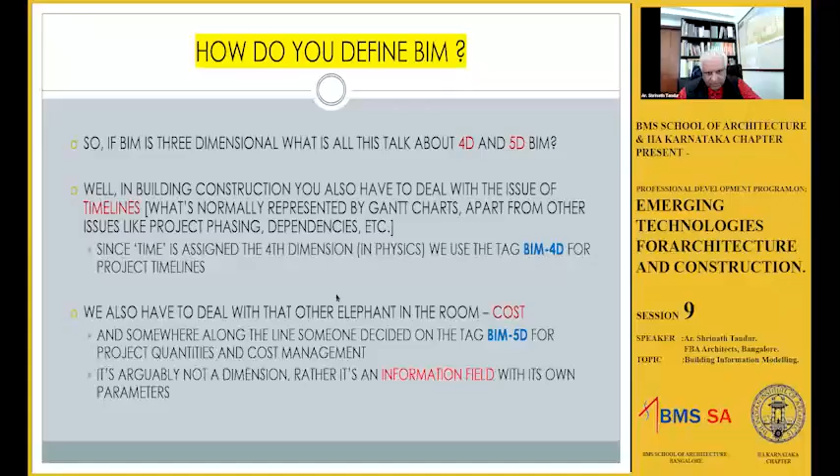Yeah, so I'm going to move to building information modeling. And while it says emerging technologies, we should realize that it has been around for over 30 years in some form or the other. But in many cases, it has been in the field of advanced engineering, advanced institutions. So architects have adopted BIM into their practice, but still there is a hesitancy, and still we see a lot of architects who ask questions like, what is this BIM? I already have CAD, why do I need BIM? And if they are convinced that they should go for it, then they say, how do I integrate it into my practice? Have other architects successfully implemented it?

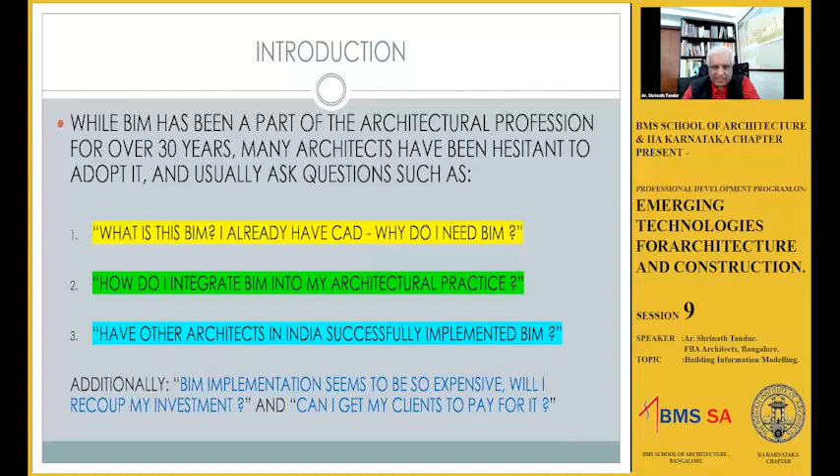BIM's implementation seems to be expensive. Can I recoup my investment? Or probably the most important question is, can I get my clients to pay for it? Now, these are the questions that we will try and look at in the next few minutes. There are many aspects to BIM. It's now a vast subject. Building information modeling started off very basic, and now it's gained a lot of traction. And in the time allotted today, what we can do is not really a deep dive, but we will look at an aerial view of the whole thing, and we'll look at the challenges of BIM in architectural practice.

So we look at a brief history of BIM. We look at how do you define BIM and differentiating between 3D CAD and BIM, because there's a lot of confusion there. And again, in the audience, I don't know how many people are expert at this, how many people are in the process of implementing, and how many of you are new to this. So I'll have to balance the talk without getting too deep in it. And we'll look at things like BIM dimensions and the granularity of BIM.

And one important thing that I will touch upon is the interoperability between architects and their consultants. See, the client normally looks at the architect. They don't see what's happening behind the scenes. We have an array of consultants, and sometimes it's very specialized, and not all of them are on BIM. So how do you work it out?

So implementing BIM in an architectural practice and setting up a computing environment is very, very important, because after you've done your basic thinking, you're now handing it off to a production environment where your computing environment has to be really solid.

So the impetus to design, when I use the word design, I'm using it with quotes, because people confuse drafting with design. Earlier, you used to have the acronym CAD with the CADD, computer aided design and drafting. Most of the time, it used to be drafting a model, whereas virtual buildings today have their roots in manufacturing.

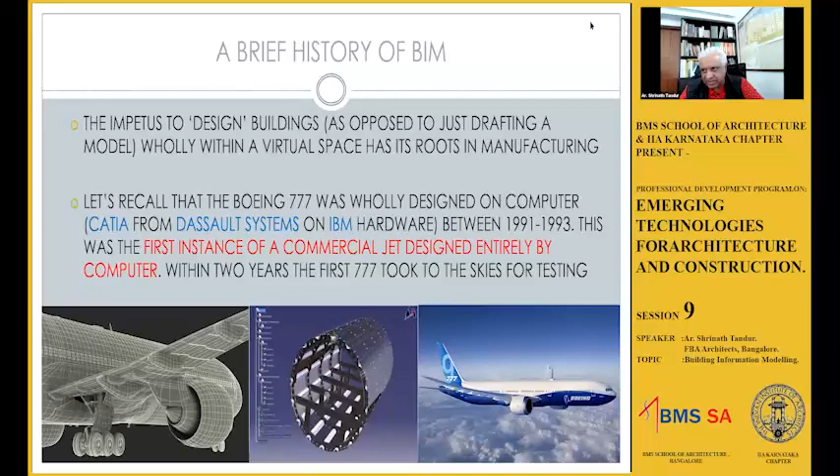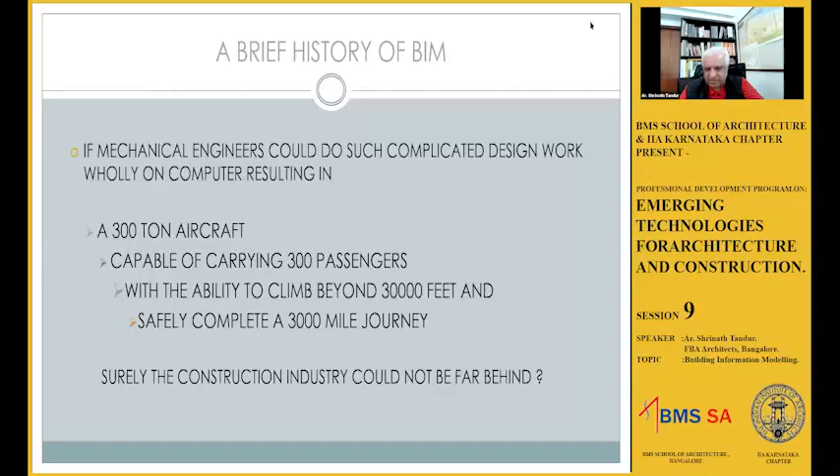So we can say, if mechanical engineers could do such complicated design work wholly on the computer, resulting in a 300-ton aircraft capable of carrying 300 passengers, I'm rounding off these numbers, with the ability to climb beyond 30,000 feet and safely complete at least a 3,000-mile journey, surely the construction industry could not be far behind, right?

Actually, even though this happened in 91, 92, 93, BIM has been around since the 70s and 80s in some form or the other. And like I mentioned in the beginning, much of this remained within the halls of academia and government-funded research labs. I know some of this because I myself did some research during my master's program, and we actually built models using Cartesian coordinates instead of drafting them. So we understand simulation from first principles.

And a few years later, Graphisoft was one of the first companies that released a building information model software aimed at architects that could be run on a personal computer. That's the key difference, because personal computers, compared to today, were still quite slow and very limited in their memory. Those of you who worked with early versions of Windows or even before that on DOS know what I'm talking about. And despite the economy of the computer, the programmers managed to fit in a complete building design software. And ArchiCAD was really an eye-opener for all of us.

I started working with ArchiCAD in the 90s and realized what I had been missing, because by then we were already pretty good with AutoCAD. We were pretty good in making 3D models in AutoCAD, but this suddenly changed the game.

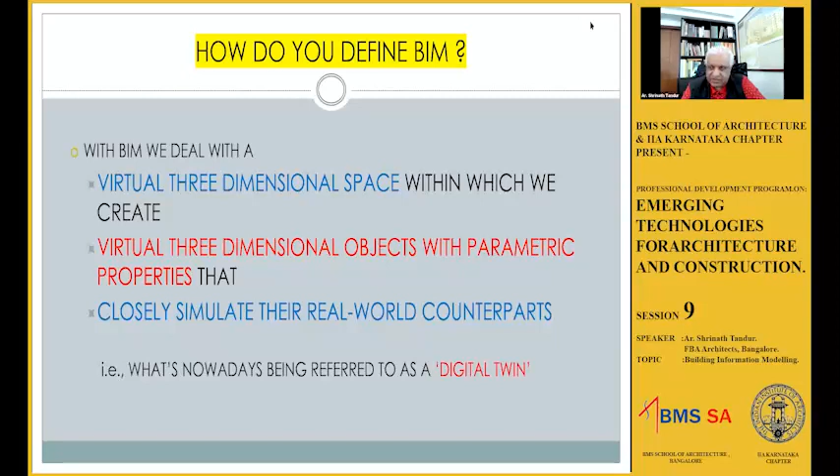So what are these properties that we are talking about? It includes material makeup. Now, in a CAD model, you could have a vector-based outline, and then you can sweep it along some curve and make yourself a surface. But it's not really a digital twin of what could be built.

So the material makeup includes properties such as density or thermal conductivity, or whether the object is opaque or transparent, and even the surface characteristics, how rough is it, its texture, its smoothness, its color, its reflectivity, does it have elastic properties? Like in the automobile industry, they are very interested in the performance of a tire, for example, for their vehicles. So you need to know how these materials behave.

And then you also have dimensional constraints, beyond which a particular object may not perform to its design, to what it was designed for. So these dimensional constraints are another example of parametric properties.

One simple example of a parametric property: you may have a column that goes from the ground floor to the first floor, and it's a street-side building, so the owner says, I would like to have a shopping-oriented ground floor, and I need a higher floor. So when you lift up the first floor or the floor above, the column should automatically connect the two. So one of the properties of that column is that it fuses itself to the lower floor and to the upper floor, so that you don't tell the column what its height is. You just play around with the levels, and then one column or 100 columns all take the same parameter to decide how tall they are.

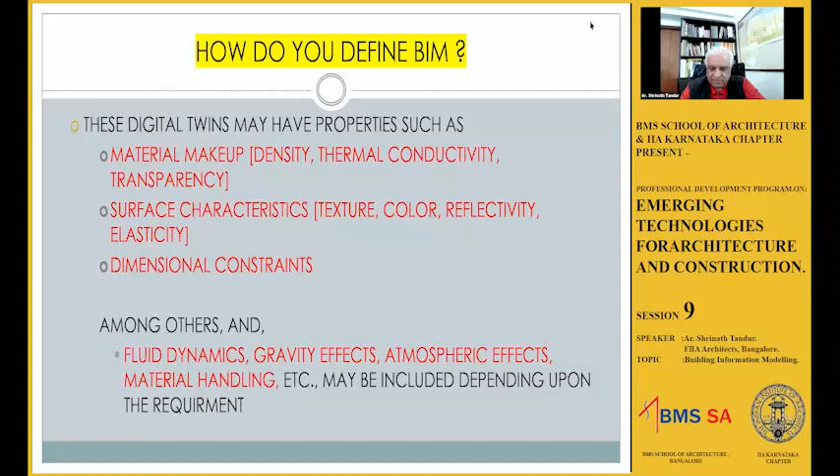So one of the important things when defining BIM, if BIM is a three-dimensional space, what is all this talk about 4D and 5D? In construction, nothing is instantaneous, and building construction is an expensive process. Look at contractors, especially on bigger projects, where construction timelines are very important, with phasing and activities dependent on each other. Just like in physics, time is assigned as a fourth dimension. Somebody tagged this BIM 4D for project timelines.

Then there's the other big elephant in the room, which is cost. You need to quantify everything, know every single part, know what comes first, and know the cost of putting something in place - not just raw material, not just transportation, not just labor, but all of them added up. This is what contractors are very interested in. Most of the time, this BIM 4D and 5D, with the fifth dimension being cost, is something larger contracting firms are very invested in.

Architects, not so much yet. Most architects are still building models rather than worrying about the timeline of project construction, unless a contractor asks for it. Developers do that, and costing is something we try to quantify and assign a cost to. But still, this is more of a contractor or builder's role.

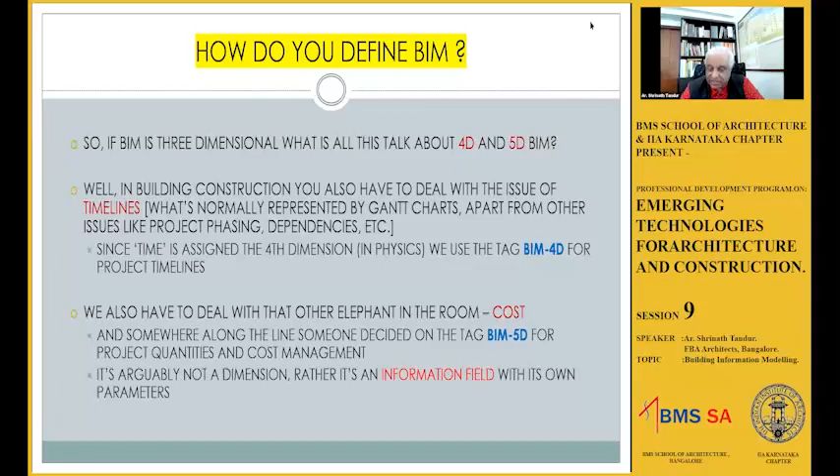Then there's maintenance over the life of the building, another information field, which you can call 6D, typically the facilities management component. Then you have energy performance forecasting, which somebody has tagged as 7D. Many people call this 6D and 7D in that order, while others flip it around, calling 6D sustainable architecture and 7D facilities management or the life cycle of a building. It's okay - it's what you define and follow, and that's perfectly fine if they're interchanged.

In any BIM environment, you automatically start with 3D by default, and then incorporate any of the other Ds independently. You can, for example, do your energy studies without worrying about costing, or the timeline of construction. You can assume that after modeling, the building has been constructed, and ask how it will perform. You can completely skip the 4D and 5D process if that's not what you're interested in.

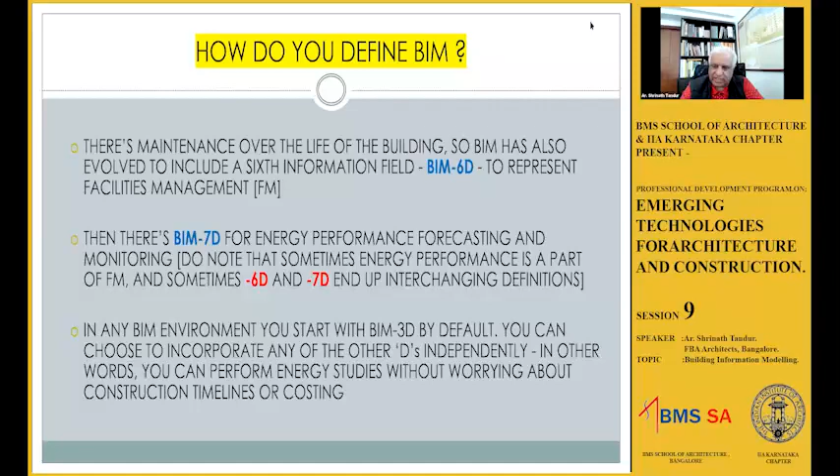In fact, early studies of buildings typically skip the timeline and costing part. You build your 3D model and then do energy studies on it, which actually affect your design. Then you can go back and revise your design to suit the results you obtain.

Here's a diagrammatic representation. You have your person, the architect or architectural team, thinking about many things - the emotional side, inspiration, and engineering. You have all your specialties - structural input, MEP, landscape, and all of them - many times working across different time zones, using the internet a lot to get input. Your contractor also comes up with shop drawings, depending on what needs to be fabricated, perhaps in a factory and then brought to site.

Then you create a nice 3D model, and from this 3D model you actually extract two-dimensional drawings - you can see this very important link here. Over the time of construction, using this three-dimensional database, you can add the remaining information fields - your timeline, which includes every aspect of construction, and your costing going in parallel with this. The whole purpose of using BIM is to bring down the cost and bring down your construction timeline.

Further to this, you can do facilities management over the life of a building - all kinds of maintenance tasks, sometimes additions or phasing. You can also do energy management based on weather and response to your surroundings, and use BIM to bring down the cost of energy, bring down the cost of maintenance, and other fields that follow. This diagram gives you an idea of the interrelationship between all these so-called BIM dimensions.

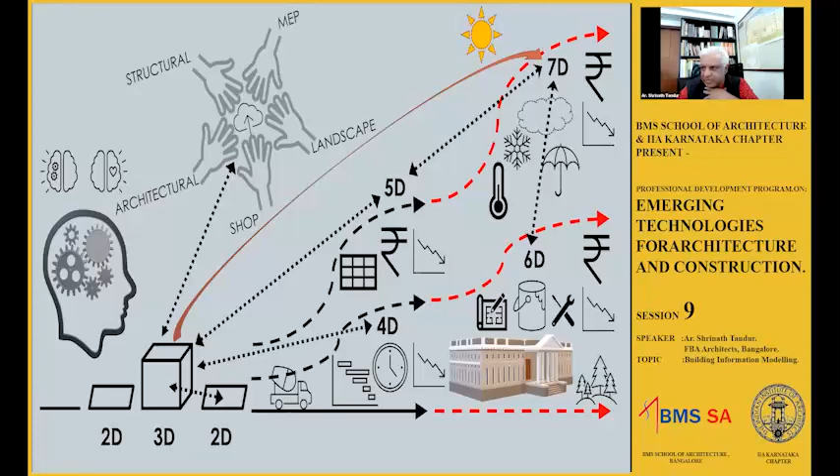And it doesn't stop there. You've got other fields of information, sometimes referred to as BIM 8D, occupational safety and health. Today it's becoming a big topic, especially your indoor air quality, the germ warfare you're trying to fight, and sometimes crowd control if it's large gatherings of people. So it could be a part of 8D, because again, you're talking about occupational safety.

But these are very specific to stadiums and metros, where large groups of people who are not familiar with the place come and go. It's not like an office building where you know your way around. So crowd control is very important. It is a field of study that may be a part of your building design, your planning during building design.

Then you have dynamic buildings that can change their shape, form, and location. There's no specific dimension for this, but it could be another field of information you'd wish to consider. Then you have embodied energy.

That's another field that people talk about - how much energy has actually gone into making this building? You can say you've added solar panels, but there's a lot of energy that goes into making a solar panel before it can even produce one watt of energy. So what's embodied in it? You may wish to add that into the energy used in your construction process.

Water recycling and management is another very important field of study. Also closely associated with buildings, and I think it should actually take more precedence in an architect's scheme of thinking, are landscape elements. Typically clients think of it, or everybody thinks of it, as an afterthought, but it should be very closely integrated into your design, because they can grow and change with the seasons. In India we don't have that dramatic change of season other than monsoon and non-monsoon, but in other temperate or higher latitudes, you do have very distinct seasons.

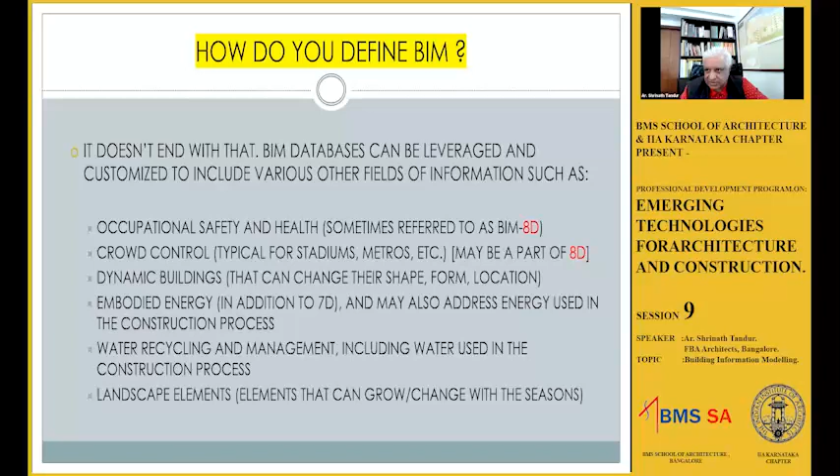And all the other topics we saw in this webinar series, which include point cloud capture, artificial intelligence and big data, 3D printing, Internet of Things - so many topics we saw. We did see digital fabrication, VR and AR, and we also saw some use of robots in construction.

All of these can be modeled. You saw examples of them, some really powerful examples, and they go way beyond what most architecture practices do. You could see them using BIM in some fashion, some form or the other, and they never talked about BIM dimensions - they just did their work, and simply consider these as a one-off input or output to your BIM.

Then one of the things we have not escaped from, and I don't think that's going to change anytime soon, probably until robots take over construction - until such time, is the construction document set. This is probably very important. I know students in the audience today will see design more in an emotional manner, but the engineering of it and the drawing production is very, very important, because that's how you convey information to your contractors, and they build from your plan.

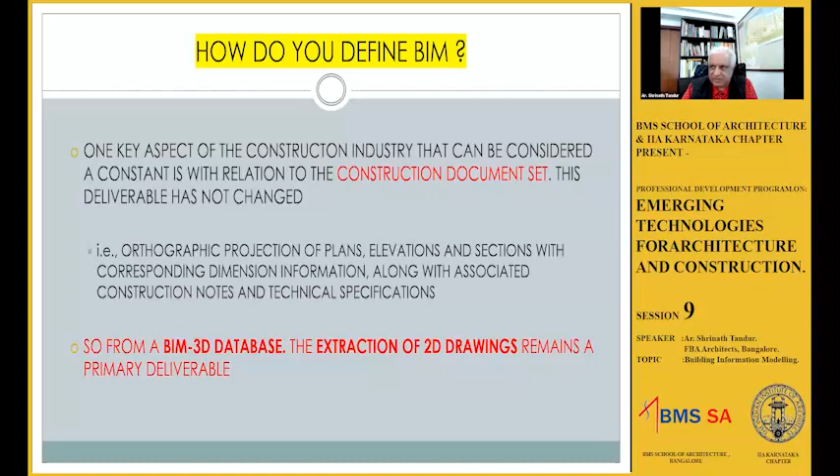And then to these drawings, you add your construction notes and technical specification documents. So from a BIM 3D, or what you can consider as a BIM 3D database, you extract a whole bunch of 2D drawings. That remains a primary deliverable. We can't escape from that at this point in time. All practicing architects in this audience, I think, agree with me on that.

And even though sketches are there, you still go to site, you can still show them, but the BIM can be used to make people understand, make the contractors understand what you wish to get done - but eventually he's going to look at the drawing.

And prior to the evolution of BIM as we know it today, you did have a lot of very good visualization tools, and they are all still around, and you used 3D CAD. And this allows you to record and share what you imagine. And software such as Autodesk AutoCAD and Bentley's MicroStation. I think earlier MicroStation was called Intergraph, and I don't know if they purchased it, but AutoCAD and MicroStation were the mainstays for drafting your work.

And you used 3D primitives such as cubes and cones and donuts and spheres, and then you added vector-based entities that you sweep across paths, and you created really complicated solids and surfaces to express your building. But these 3D models have limited real world properties. I mean, you still have software that can augment those into more intelligent models, but they were not designed from the ground up. But they could be photorealistically rendered and used. They were very good visualization tools.

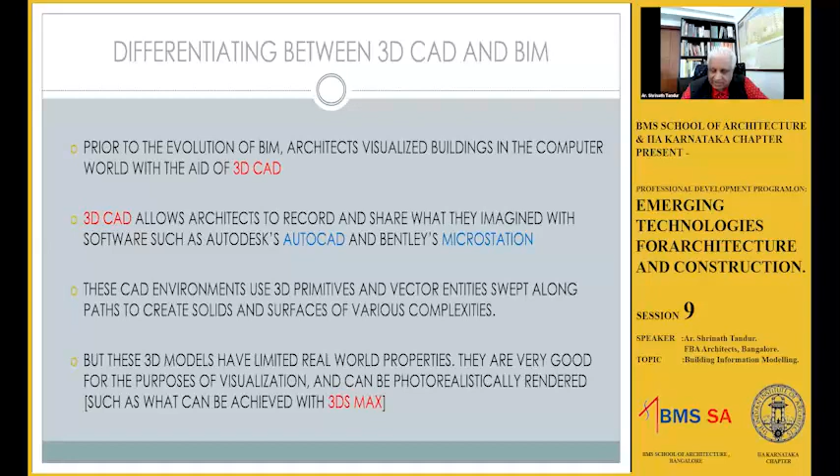Like today, you still have Max going around, and for those who do not want to use Max, there's another tool called Blender, which is very widely used for rendering purposes, even in the film industry. So you have these 3D CAD models. For example, I'll show you one model that we did many years ago. This is a mechanical engineering model. It was for the DRDO many years ago.

And you had this cylinder that you see here, that was your test chamber. To give you a sense of scale, that must have been about 10 meters long, about 3 meters in diameter. And all these things were various combinations of compressed gases that when combined sent a jet of air here. And you can see the very long exhaust here, and all these were housed in separate buildings. I'm only showing you the CAD model that we created, even though we are not mechanical engineers, but we are good at modeling.

So we did this, and the reason I'm showing you this example is to show you that it's just a dumb model. It did not have any capability to actually do airflow simulation. It did not have any material properties. We did not know what pressures it could withstand. It was more to define a concept and to explain to the scientists at DRDO what the proposal was all about.

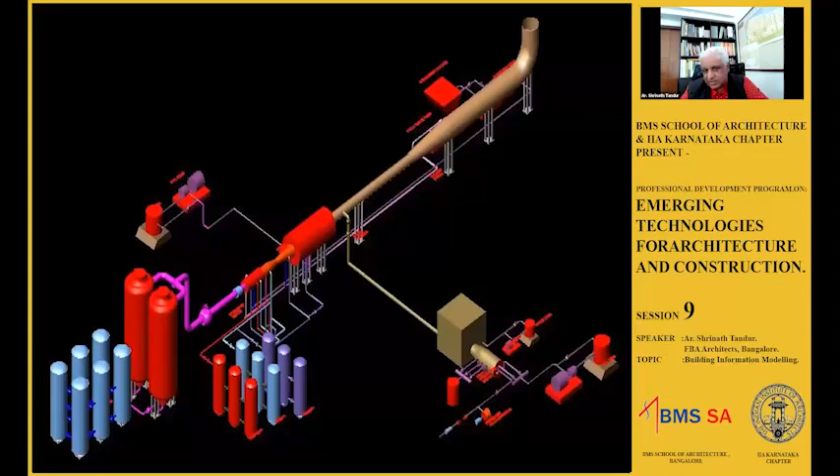And as an extension to this, you would be happy to know that India is only the third country in the world to actually design and test and fly a scramjet engine as of 2019, after the United States and Russia. And other countries do have the expertise, but India is only the third country to do all of this indigenously.

So while we do have CAD software that can help us build very complex models, remember its entities can be given material attributes, and it can be made to show that it's an intelligent model. But remember, it's a shoehorned-in process. That means it was not designed from the ground up as a native virtualization. It was more of a modeling tool. And today you have AutoCAD Architecture. Earlier it was Architectural Desktop. It's still marketed by Autodesk. And there are companies that still use it.

In fact, about 10 years ago, there was a lot of debate about, I have Architectural Desktop, I have AutoCAD Architecture, why do I need BIM? And then slowly you started to see that the extensibility of BIM is much more powerful. Because with BIM, you can place digital twins in a virtualized world, and your model can be made available for others to experience and extend their properties. So that was very important. You could design the model in such a way that other disciplines could add on to that.

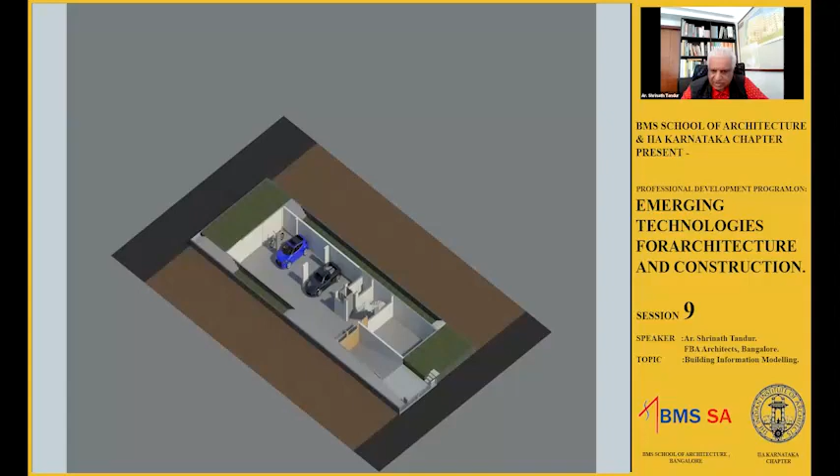Earlier I showed you just a CAD model. Here is an example of a BIM. An entire house, every floor, all the elements that you see in this floor were defined in their construction roles, whether it's RCC walls or stone walls or stone cladding or glass, you name it, what flooring we used, what furniture layouts we used, what lighting we did, everything was modeled in this building.

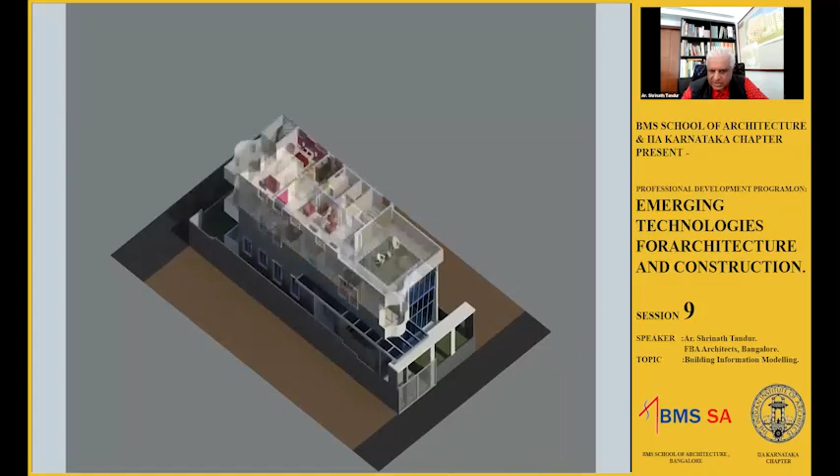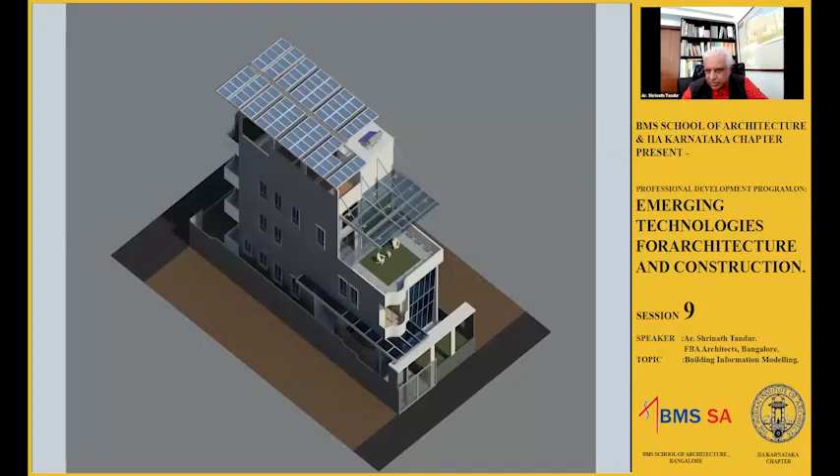And all the floors, including the solar panel layout, were modeled and built exactly. I would say almost exactly, because we did do some changes at site. And today an almost exact replica of that building as seen in the BIM is now built.

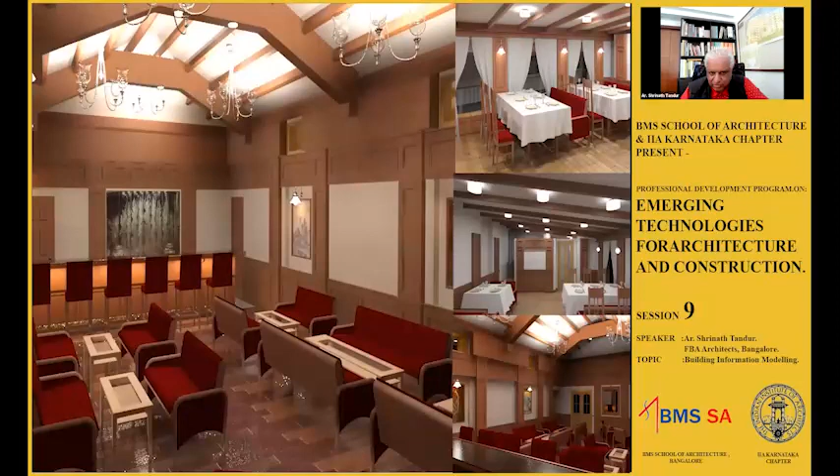Other uses of the software that we use, in this case it was Revit that we had chosen from Autodesk many years ago. We suddenly discovered, to our happy surprise, that you could do a lot of in-house renderings, you could do simulations, you could do interior materials. Here we retrofitted a bar and a dining space.

Then we also did, the usefulness of BIM is complicated roofs like these. We were able to work with the contractor and give him the exact cutting patterns, because you can see the complexity of the roof here. We're able to do production, not really shop drawings, but we were able to extract the shapes that the contractor then went and made easily. He was able to make shop drawings for a complicated roof like this.

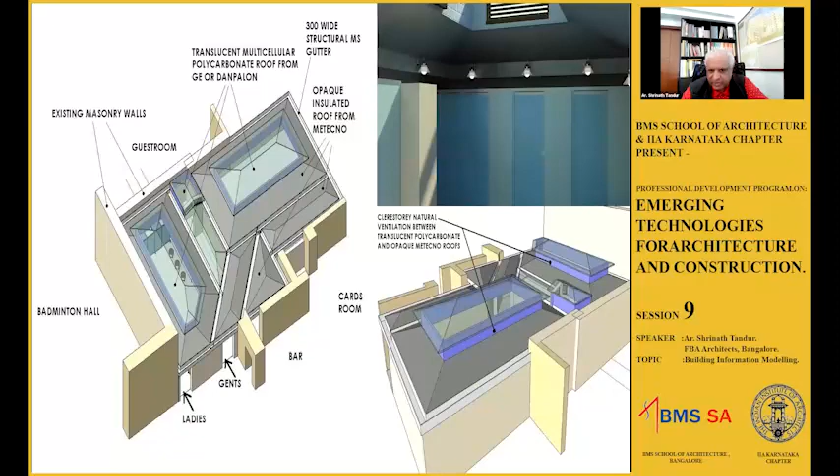And these are some of the usefulness, and all this was done within one model. It was not external software. It was not like you did something here and then exported it to something else. No, everything was done in-house.

Here we ran into some problems in the early days. When we started using Revit, we did not have any knowledge of Rhino or Grasshopper. So doing these difficult elements, such as these tapering walls, everything was crafted manually inside of Revit. We wanted rope around wooden beams, and we had to manually create them. There was no library, there was no family of content. Everything that you see in this model here, apart from the furniture, was all handcrafted.

And so it was a very difficult process, but because we understood how to create these entities, we were able to do it. But today you can do these things much better. I think the next generation of architects who are familiar with programming with Dynamo or Rhino and Grasshopper will probably be able to knock this off very, very quickly once they know the requirements.

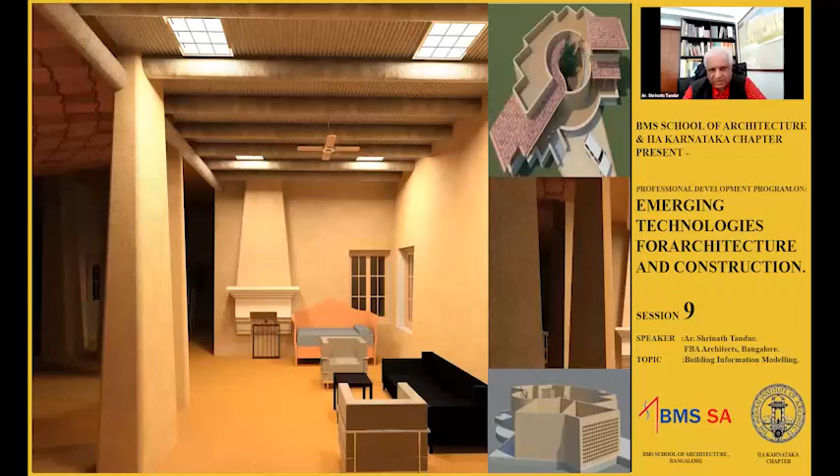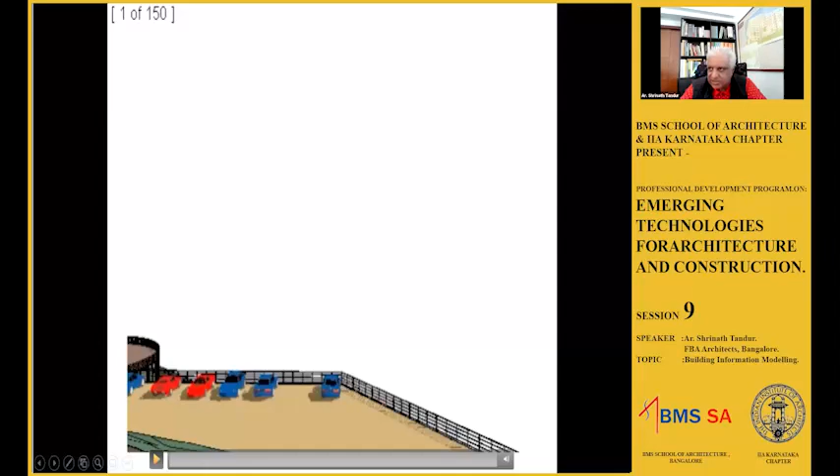And then also inside of Revit, I keep bringing back Revit because we depended a lot on Revit, even though there are other tools in the market. We found out that we could create very, very quick and dirty animations. You don't have to render completely. You just model your environment, your terrain, and then you run a very quick one. It's not a very smooth model. Look at it; it's just 150 frames, but the client is able to get a very clear idea of how his resort is going to look.

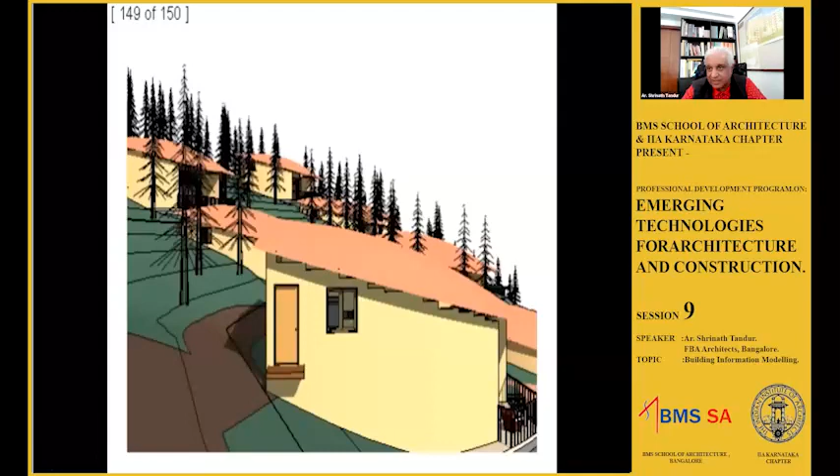Right. So we have not even put any materials on the walls or roof design. We have not done anything. We did a few more 100 frames like this and did a walkthrough throughout the property, and the client was able to get a pretty good idea. And then they gave us the okay for going ahead with the next level of rendering.

Another project that we did, I'll give you an idea of how quickly this happened. We started on a Monday and worked through the week, and 9 days later we were ready with the presentation. And this was a central administrative building, almost 30 floors tall. And that was from the time we studied the client requirement to understanding the bylaws, the various planning options, to creating models, plans, renderings, and solar studies.

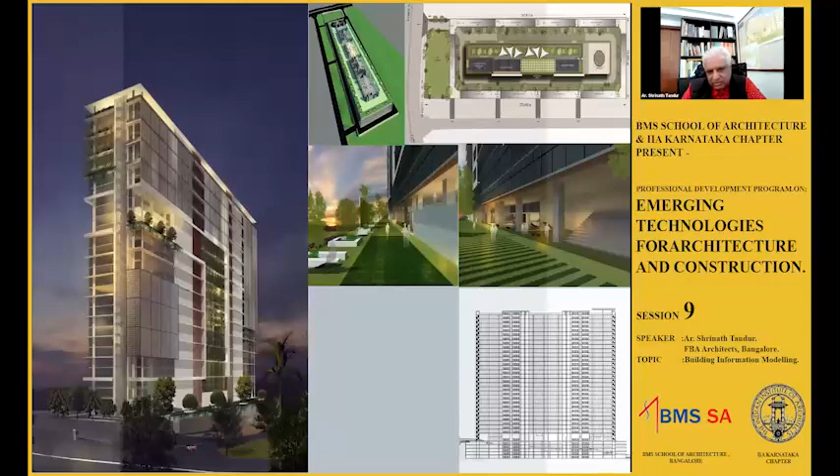For example, because the building orientation was not exactly north-south, we were able to study the effects of solar gain, and not just lighting studies, not just whether it's sunlit or shaded, but actually get the energy values. We were able to do all this in about 8 or 9 days and make a presentation very quickly.

So you have some very powerful tools packed into software, able to do things that you were not able to do earlier with such speed and clarity in thinking. It frees you to think deeper into the subject, and allows you to do a lot of what-if scenarios, and give the client more options in the very first week or so of the project, which is a very powerful time in a project.

The decisions you make in the very early stages of a project sort of cascade throughout the design, and become permanent. So the tools that are wrapped into Revit and software like this help architects see deeper into a project very early into the project.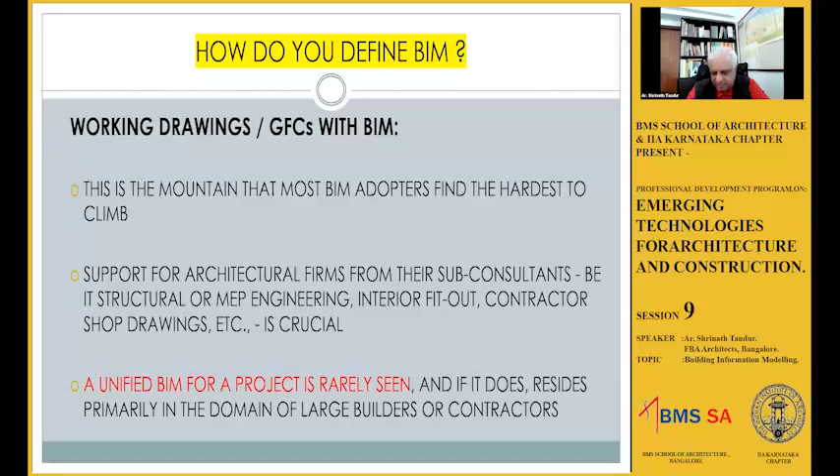So the majority of structural design, as you know, is RCC design, and most of the structural engineers work with software such as ETABS or STAAD.Pro, and sometimes they use STAAD.Pro even for steel design. And then they have offshoot software for that, such as RCDC, to create your CAD output. So they give you AutoCAD drawings at the end of the day, and there is no cross-pollination between the way they do the work and the way you receive and change information.

Many a time what happens, they give you the sizes of the finished column, and then you input just those sizes. You don't even know what reinforcement they are using. So yes, there's a tool called Robot within Revit, and there are no structural engineers that use Robot. They are all trained in ETABS.

And so now ETABS does have a linking tool to Revit, for example, and even STAAD.Pro. So they are able to link back into your AutoCAD. Before AutoCAD, they're able to link back to Revit. And then before you produce your AutoCAD output or a printout for the contractor, you are able to do your bidirectional data transfer.

But that's just happening. So I don't see many architects working on it yet. We are still struggling with this. We have not yet mastered it. Of course, it'll take a couple of years. And MEP consultants, that's another big issue here. Also, they provide mostly SLDs, or what are known as single line diagrams.

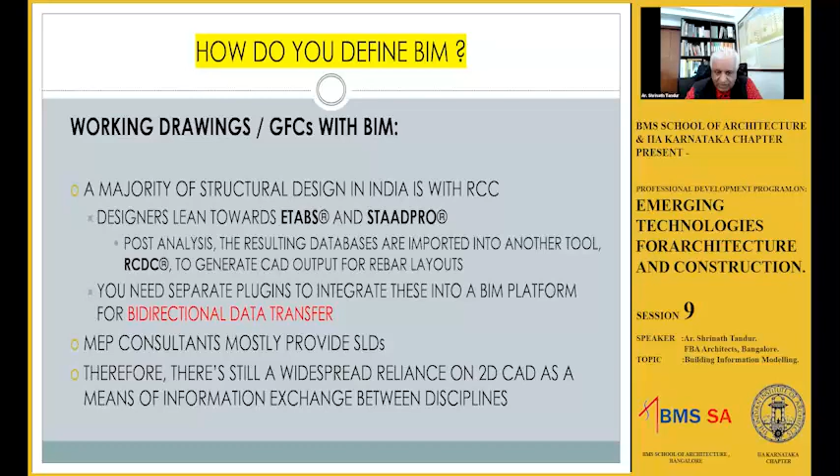Here is a classic example that we faced. This is an apartment housing complex where the design master plan was done by a British architect, and then the local developer appointed us as the local architects. And the model that they sent us did not even work because they did not understand our local bylaws.

By the time we finished going through their design and recreating everything in Revit, the structural engineer, meanwhile, was trying to analyze the shear wall system in a separate platform. So you have our Revit model completely independent of the structural engineer doing his own ETABS or STAAD.Pro model, whatever software they used.

And while we were involved in all the bylaws related to planning, the builder or the developer did not have the time to wait for us to completely finish our studies. He wanted a brochure and he wanted renderings. And so he went to these external artists who do these models, whether they use Max or Lumion or whatever they use for creating their renderings and animations.

This project actually ended up being us doing a Revit model, the structural engineer doing the same building in a different software, and the builder going to an artist who used a different software, all from scratch, and a complete waste of time. But this is what's happening. And we are trying to close this. We know that you can achieve this from this.

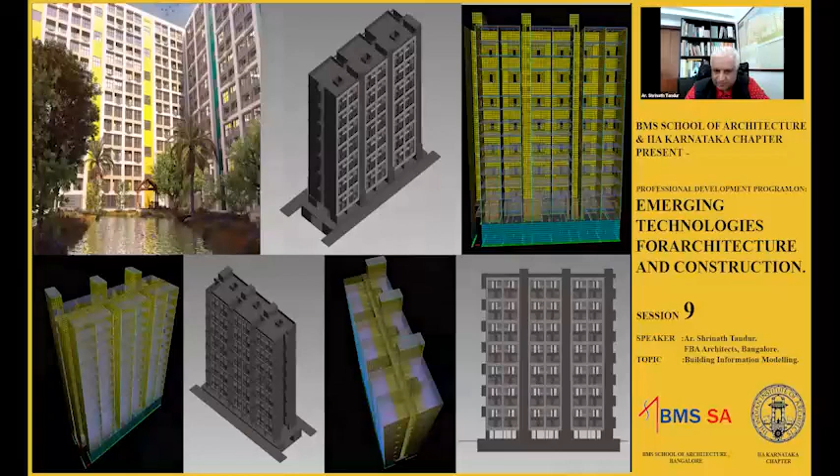Here again, this is a building design; we completely redesigned the frame exactly as per the structural calculations, but this frame was not used for structural calculation. Same here. All of these projects where we rather reverse engineered our building to include the structural input. Sometimes we included MEP. We started modeling MEP elements into our building.

This, for example, is the factory that we designed, and this is the finished product. This is a building in Chennai. This is a concept design. This is a school in Mysore, and this is a part of that. And then all of these buildings went through this fragmented process. We did not do a unified process. We are trying to get there.

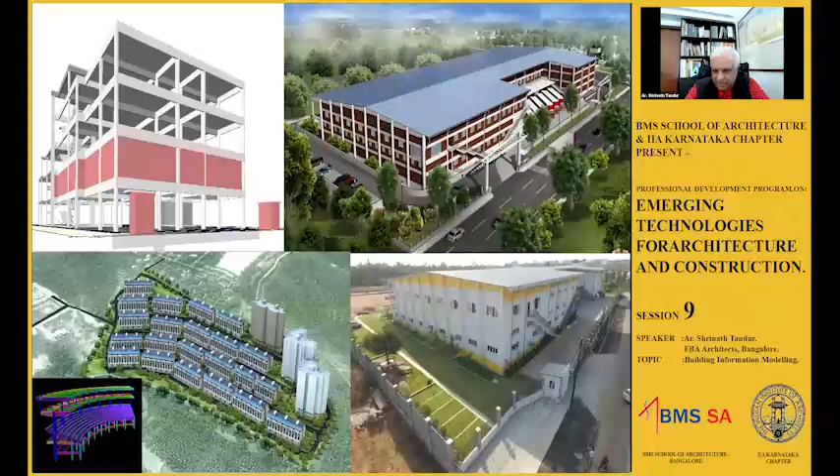So you can imagine the kind of confusion that happens when you have six different disciplines trying to get their work done at site all at the same time. Most of them land up at the same time at site, the last three months of a project. And project management consultants, for all they claim, there are very few of them who have the expertise in all of those disciplines.

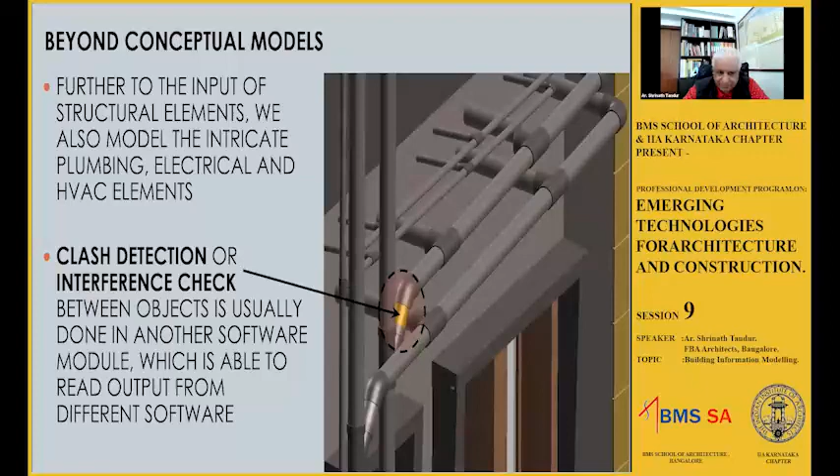Okay, so here, this building, all this entire back wall, we modeled. All the piping that you see, everything was modeled by us to ensure that there is no problem. Even the solar panel layout, the water tank layout, the air conditioning layout. This is a drone view of that solar panel layout. This is again a drone view of that building.

So even though it's not a big building, we were able to detail out every aspect of this building, including where the generator should go, the electrical installation, your air conditioning; behind this wall, there's a duct. We model everything.

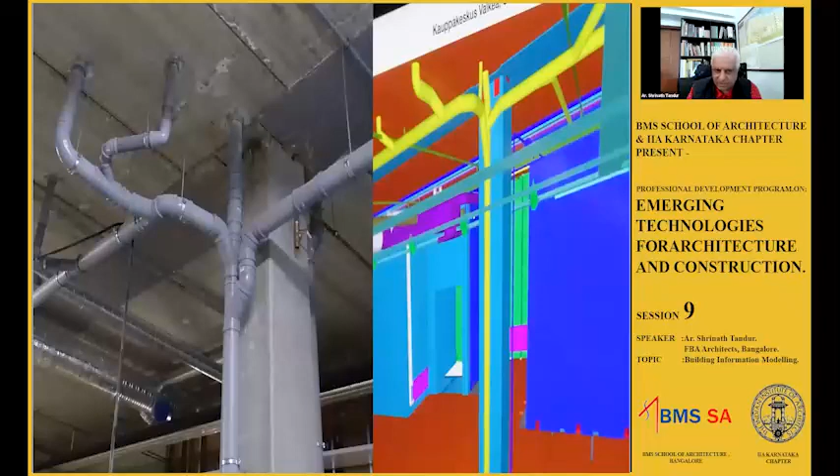When we saw this junction, I asked the engineer who was showing us around, "Can you show me this in your model?" He was carrying a tablet, and they had a GPS for the building, and inside the building they had micro GPS, allowing centimeter or millimeter level accuracy inside the building. He was able to stand here and show me on his tablet what was constructed here.

He said this was not there in what was given. They redesigned from the architects' models and the MEP designers. They re-engineered the whole building in their CAD model to their codes, and they're able to do this with hardly any mistake. The level of detail, I'll come to that a little later.

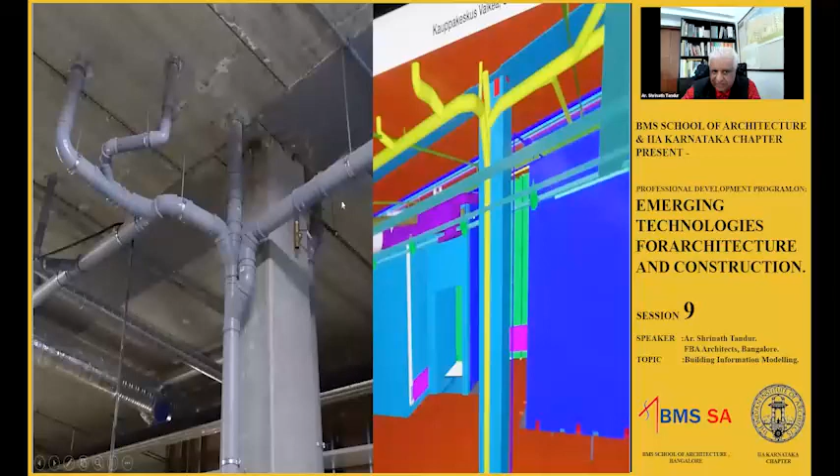I asked him about these hangers. He said they did not model these pipe support hangers that you see; they decided to skip that. They said they will do that on the site, but they wanted the major elements in place.

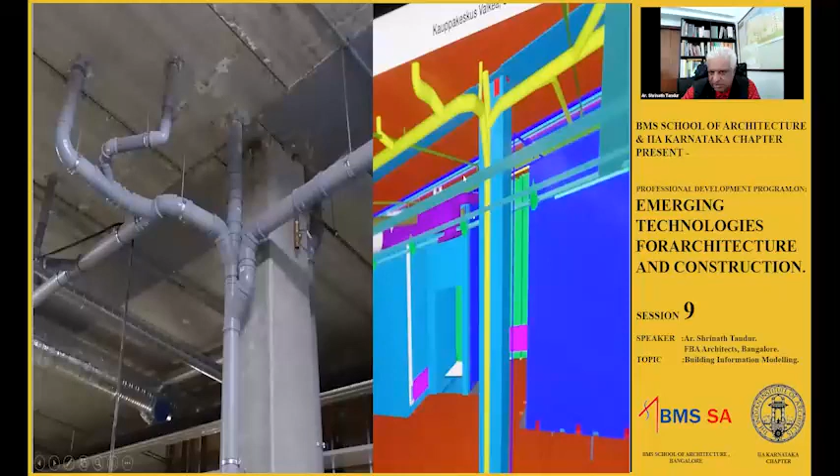So in your discussions on BIM, you will always come across this discussion on how detailed your BIM should be, or in other words, what I term the granularity of your model. Terms thrown around in the profession are LOD, or sometimes maturity level, in relation to BIM. So what does LOD mean?

We'll come to that. First, I want you all to look at it as architects. What do you do to deliver the documents related to your project? You have maybe a concept and a preliminary design schematic stage. Then maybe there's client approval and statutory approvals. And then you have your working drawings.

I would prefer that statutory approval come after working drawings, but many clients want their approval process in place before they commission the rest of the project. So we end up all the time with a slightly different building than what's approved. Then you have your final stage, good for construction, to issue to the contractor. These are the normal stages of drawings, and when you do your drawings, you also change your level of detail.

The two terms for LOD, the acronym LOD, people throw this around, is LOD is level of detail or level of development. Now the two are not the same but are frequently used interchangeably, and I'll specify what they are. In level of detail, I'd like you to relate back to your drawing - the drawing that is sent to the contractor, drawing that's sent to the site, or drawing that you send to your client to understand the project - they contain different levels of detail.

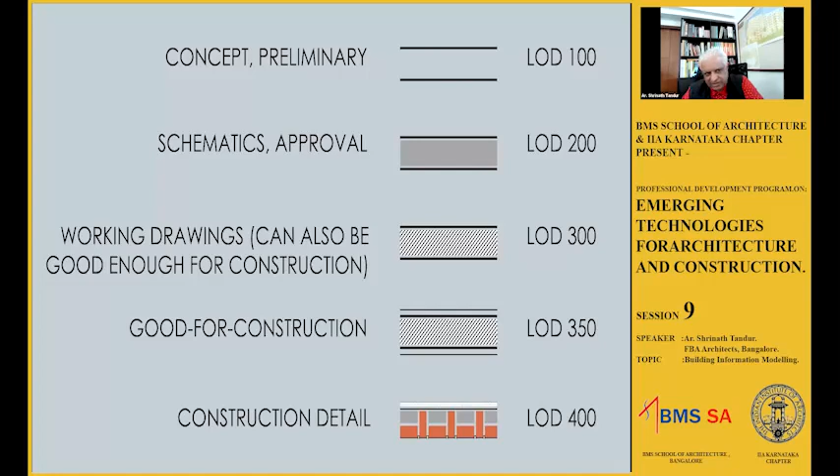Here's another example of LOD, a very common example given in most documents about BIM. LOD 100, for example, shows a column, just a block, a rectangle. LOD 200, you now decide it will be a steel column, perhaps an I section. LOD 300, you actually specify the thickness or strength of that steel column, and therefore the actual section to be used, ISMB or ISA, whatever section is available in the market.

LOD 350 will show the base plate and the anchoring of that base plate. LOD 400 will show even the nuts and bolts. So this gives you an idea of what LOD 100 to 400 is. Now you may ask, what's 500? LOD 500 means it has been executed and verified at site. You can think of it as your as-built drawing set.

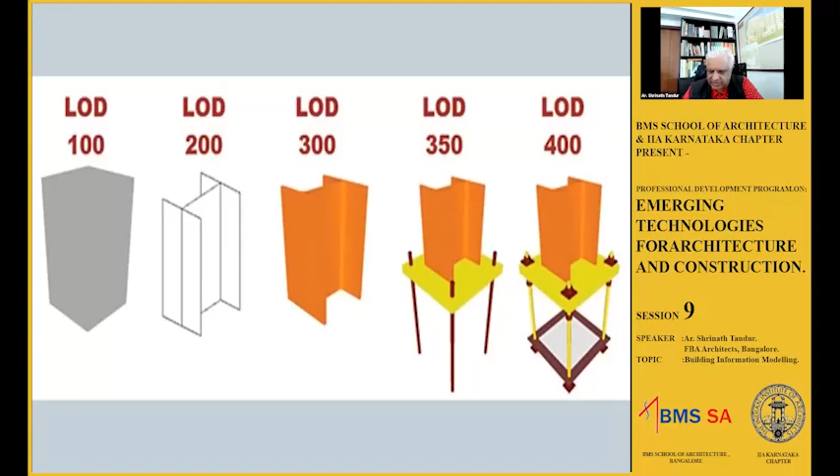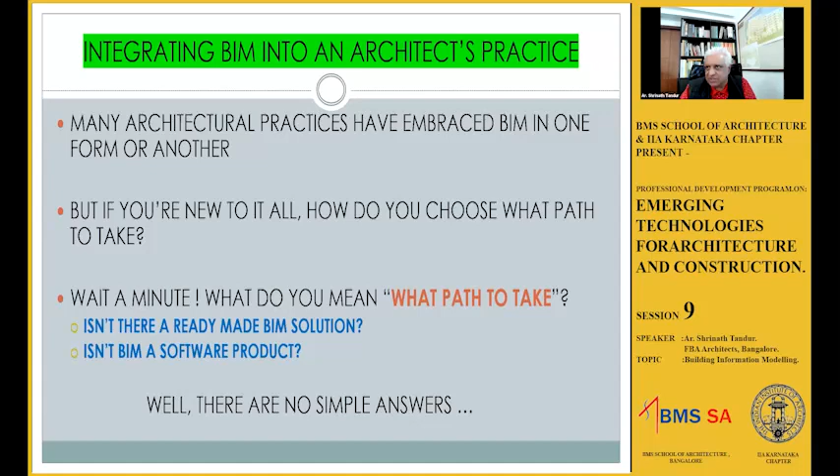Many architectural practices have embraced BIM in one form or another. If you're new to BIM, you'll ask how to choose what path to take. And your next question is, wait a minute, isn't there a ready-made BIM solution? Isn't BIM a software product? There are no simple answers for this, because BIM is still an evolving field and there are many players in the market, which can be confusing to someone new to it all.

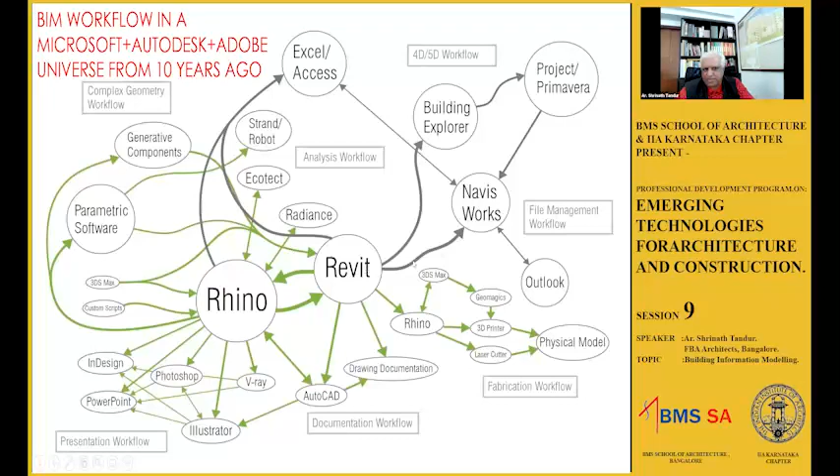So these are the kind of workflows that you see if you try to be in one type of platform—a Microsoft, Autodesk, Adobe universe. That gives you an example that you don't have to go all over the place. You can sort of wrap it up within one.

Now, choosing to implement BIM requires investment other than the usual capex. What I mean is that the firm or builder who decides to implement BIM needs to have it come top down. Otherwise, what happens is once it becomes something that somebody else does, and if the design team or the architect running the show does not understand the process, then it becomes very divorced from your design proceedings.

So you end up telling somebody what to do here and there and not get involved. That's okay, that's a way to do it. But what happens is it may end in disillusionment if and when that expert or the person who has done all this work decides to change career paths or go somewhere else, and then you will end up going back to your tried and trusted AutoCAD. This has happened before—I've seen it happen.

It needs some involvement from the proprietors or partners in the firm. In the longer term, despite the cost, there is a very good payback for when you use BIM. You have really fast project turnaround times. I gave you some examples of very complicated presentations done in a week to 10 days, which would have otherwise been very tough to make with that quality.

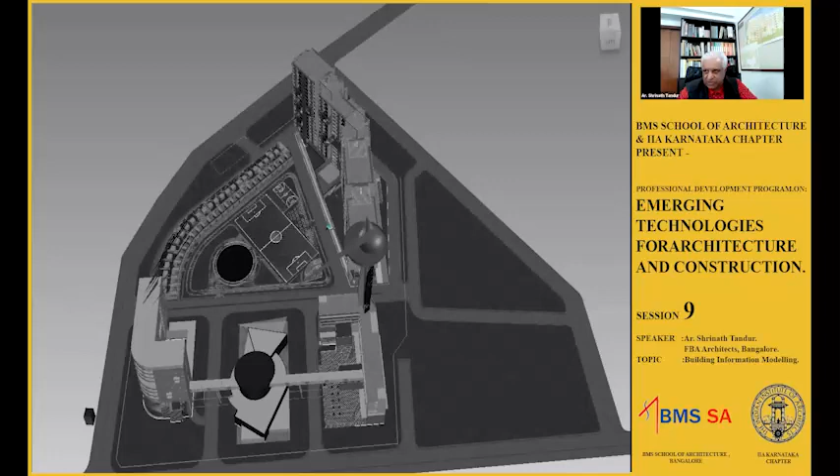And we were able to turn this around, and these kind of models were what we shared with the client, long distance. And this was way before Zoom became so pervasive, and everybody knows how to do an online call. So we were able to send these models to them, and they don't need to pay. They don't need any paid software.

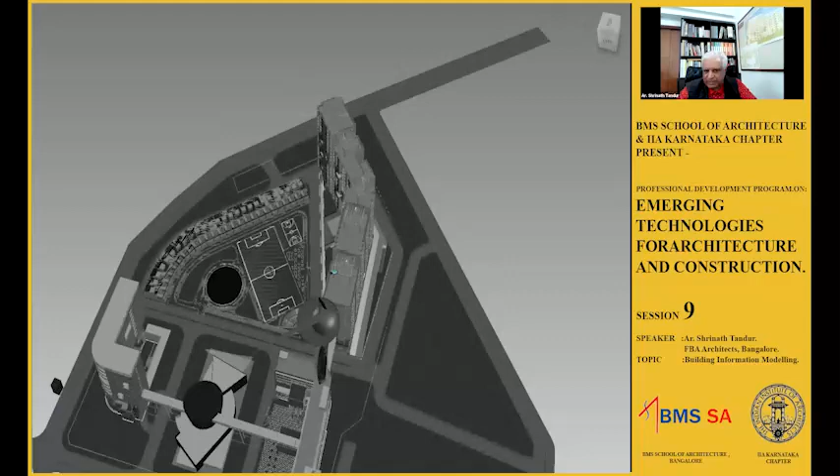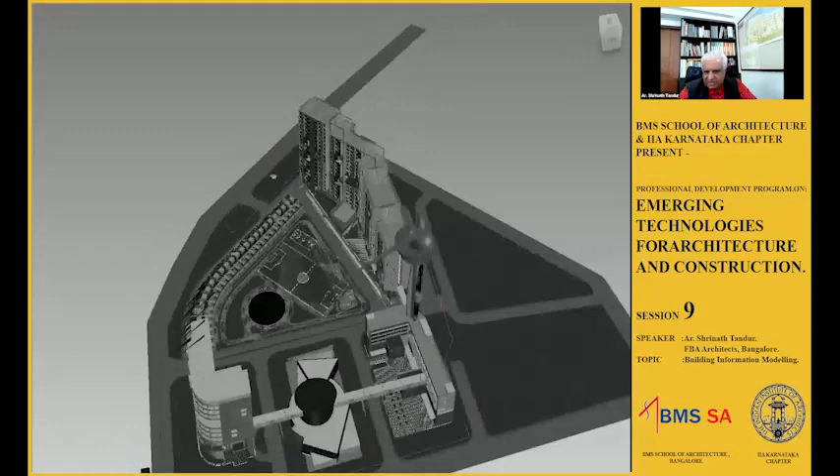This is a DWF output, which can be read by a free Autodesk software called Design Review, and they can open this model. And they can rotate this model, they can cut sections, they can do walkthroughs, they can zoom in, they can zoom out, and it's a very simplified model. Even though our BIM would be a very heavy file, the DWF output is much thinner. It doesn't occupy that kind of disk space, so it's easier to email to somebody and have them receive and open it. And so DWF is something that we work with quite a lot.

And I'm just showing this to you as a means of understanding how we communicate with clients. And today, of course, you don't need anything. You just need to have a Zoom account, and then you can all log in, and I can present it to you. But those days, a few years ago, it was not like this, and not so easy. Even Skype was a little rough around the edges when we did try Skype many times. But always internet access decides how good the interaction is. So we used to mail these around to our clients and teach them how to use this software, and they are able to understand very nicely how to do their own exploration of the 3D model. So I'd recommend this for architects.

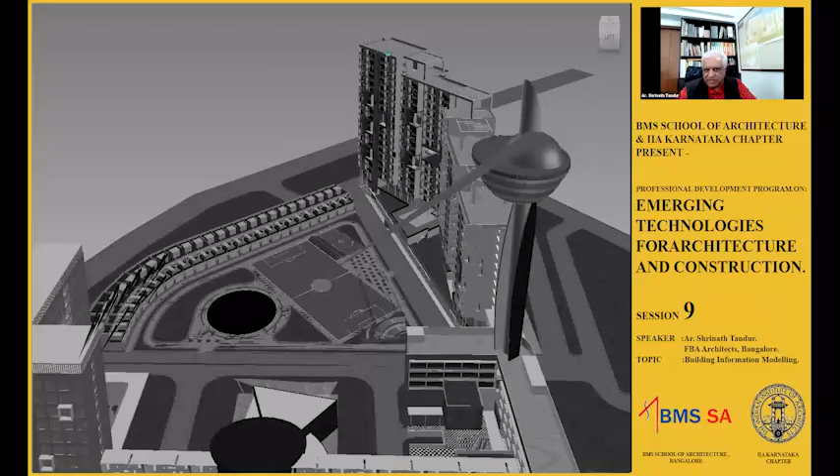I will show you one more. Earlier, I had showed you one building, which is here in Bangalore. And even this, for example, I hope you can see the changed model now. Yes, sir, we can. So here, for example, it's a very simple building. It's a very small building, but we are able to show the client how they can do their own walkthroughs. They don't need expensive software. The clients themselves, on an ordinary computer, it doesn't have to be a workstation class machine or anything, can do this. It gives them a whole sense of freedom that they feel that they are participating with their architect.

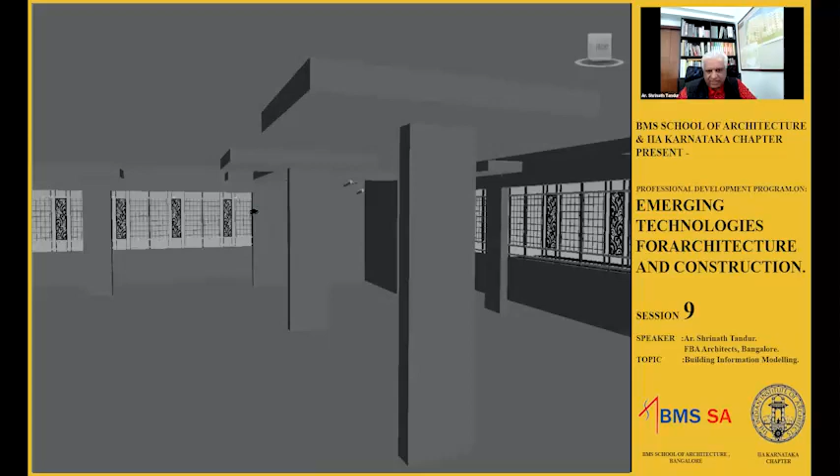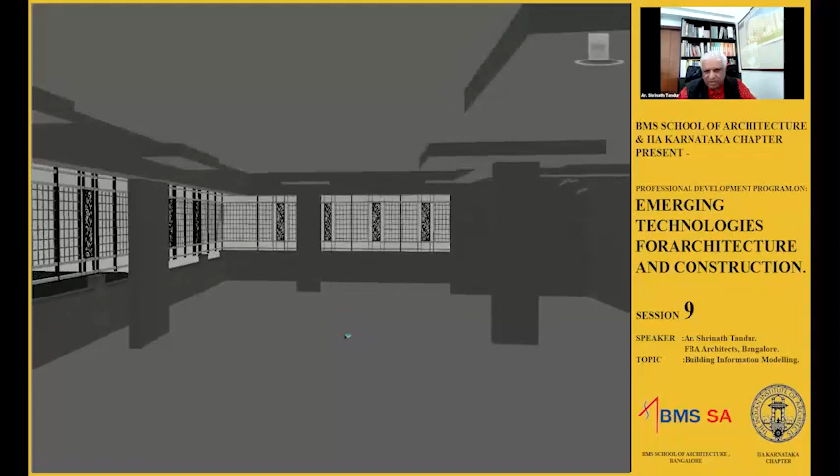And they find, okay, this is their parking area. We did populate with cars. I'm showing you a much simpler model now. So this was one of the stages of the design, and we can keep going floor by floor. We can examine all sides of the building. All architects are used to this, but clients are not. But once we give the client the hands-on approach, it makes them feel very satisfied that they are working with an architect who knows what he's doing, right? So this is their office space, and then we did an interior fit out and showed them how this can also be fitted out. So all these things are possible with exporting to DWF and sharing the model. Very simple with no real specialized software, just Design Review from Autodesk. Free download from them. Anybody can use this.

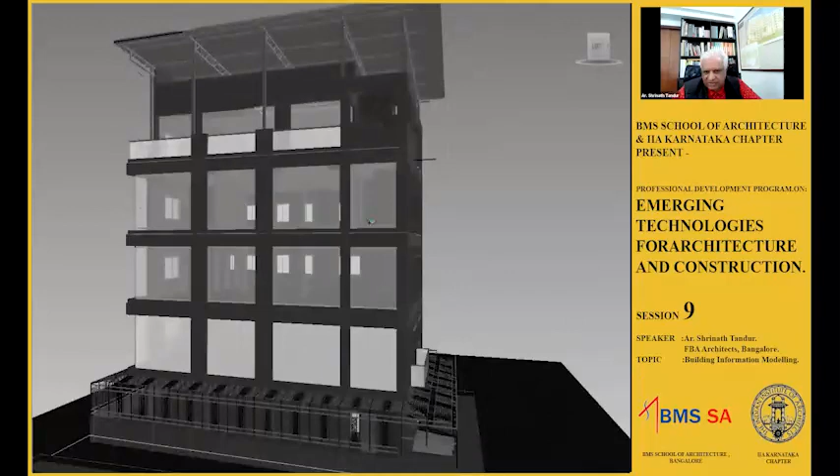I recommend this, and I'm showing it to you in grayscale. You can view it in color. The colors are not realistic though, so that's why I stick to grayscale when I do this, because it doesn't match your rendering. But it allows you to study the form and design. Over here, for example, all the pipe layout which we studied with the contractor, all that was done here. Our air conditioning layout, our electrical conduits. We even had underfloor air conditioning. Everything was studied in this model.

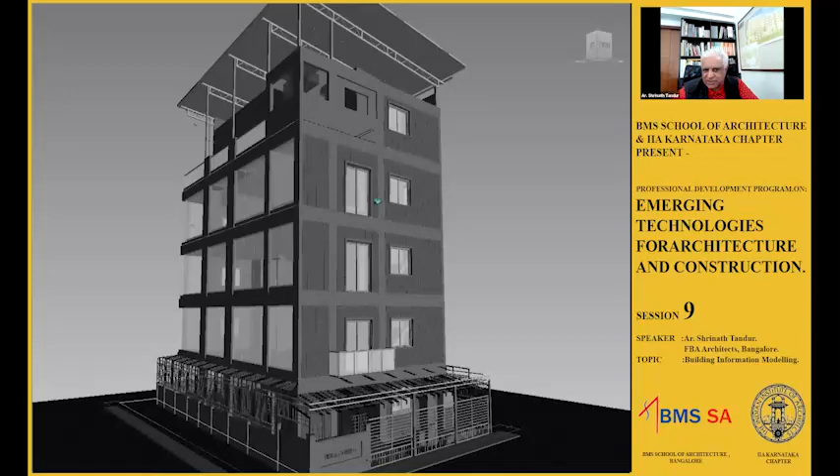This model kept getting populated, ripped open, added, put back, and you can make notes on it. You can put annotations, and it gets recorded just like if you have a PDF document and you're annotating the notes that somebody else wrote, and then they get it corrected. Same thing here. It's like proofreading your building. And this DWF engine works on the same engine that Navisworks uses for clash detection. So it's a very, very complicated software packaged into a very simple user experience. So this is something that we like and we prefer to use and discuss with our clients. I'll go back to my slideshow.

Okay, so quick discussions with DWF. Clients understand the 3D models, interactive 3D, much better than drawings. And we found that DWFX, FX is a later version of that. We found that the DWF format is a very, very useful format. You can explore the options with it whenever you feel like.

And BIM gives you greater control over changes. You make a change in one, all your drawings get updated. You change your door size, your sections reflect that. And one model can be shared among multiple participants. You can choose which phase of the project they can touch, or which other phase of the project they can just view.

Output in the form of drawings, 3D printed models, and virtual reality options. All these give you the payback. It's not easy to calculate what your payback is, but it really makes you a more powerful architect.

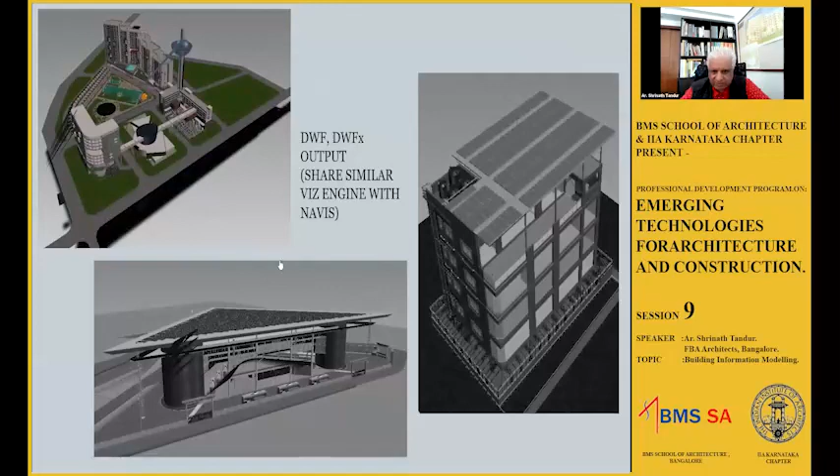Okay. So I'm showing you these buildings in DWF because they share a similar viz engine with Navisworks. And in the computing environment, in most architects' offices, you will find that a Windows environment is typical. Right? Most people use Windows. The networks are simple, about 15, 20 computers, or maybe not more than 50 in larger offices.

And there'll always be somebody more artistic or who prefers the features that are found in a Mac operating system. But then you may be limited in using Macintosh computers because the software may not work on it. And again, using a dual boot machine, not everybody is well versed with that. And Linux workstations are very powerful, but you may find more of these Linux machines on the server side rather than as a workstation.

And you will find that as you look at the various software around you, most BIM software suites lean more towards a Windows environment. Although in a Mac environment, you could happily use ArchiCAD. In a Revit world, you will prefer a Windows environment.

And these are very, very important investment choices, because it's not something like a mobile phone you buy and use for a couple of years. Most of these investment choices will have a repercussion, and they last for very long, run into years, and maybe a decade or so. Some of the computers will last for 5, 6, 7 years if you keep cleaning them up and upgrading now and then. Because it's not easy to change your computing environment. So you need to study this and make an informed decision.

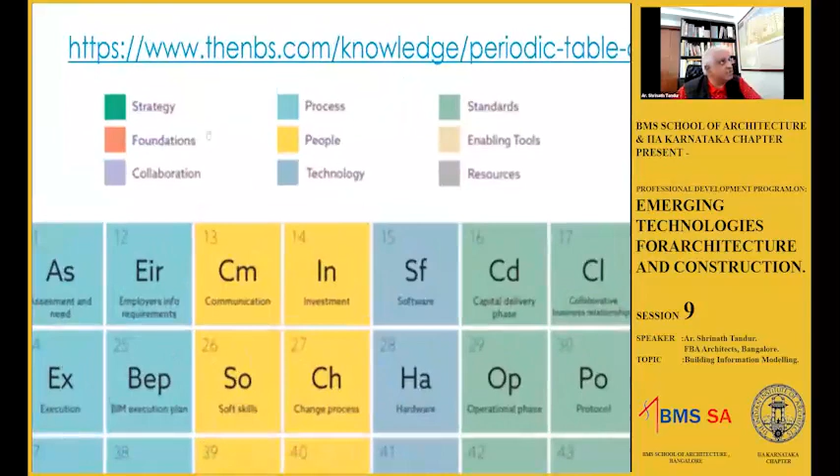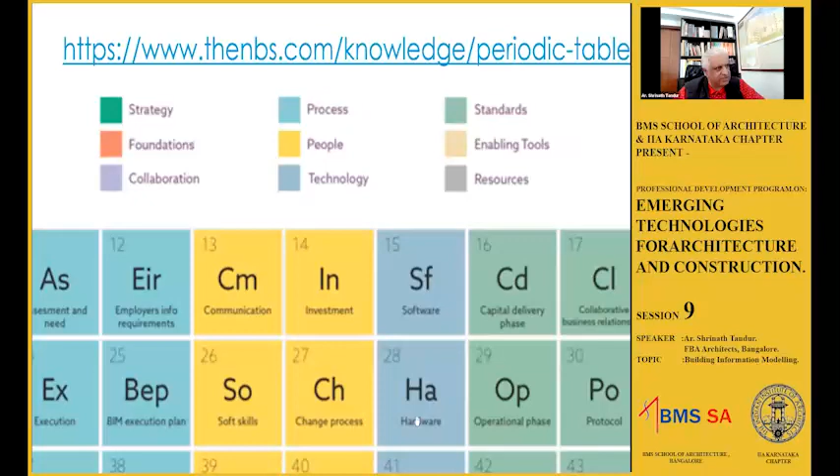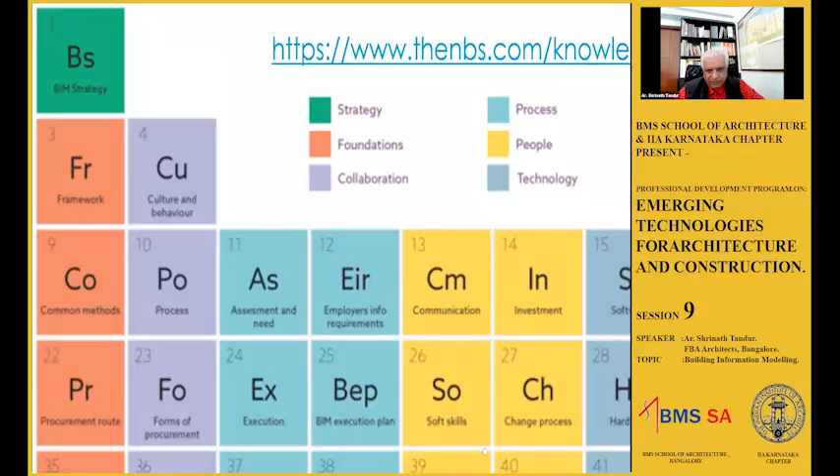You see here, they've got color-coded squares, just like in your periodic table of elements you've got elements with different properties or valencies. Here, these are your valencies: strategy, foundations, collaboration, process, people, technology, standards, enabling tools, and resources. And these tables are arranged accordingly. For example, you see technology here. Technology talks about software, hardware, training, file storage, infrastructure. Everything that I talked about for the last few minutes is in this column. So this kind of classification of information and activity is like an activity chart, like a guide.

Please download this table from the website at thenbs.com. And there's a lot of other stuff about BIM there. You can do a lot of self-study. I encourage people to do a lot of self-study. There are a lot of tutorials; whoever is the BIM manager or the trainer in your company can do a more detailed study and explain to others what this is. You don't have to implement all of this. You can implement some of it. You can start small, with 2 workstations, 3 workstations, and then make it bigger. So it's something that I would encourage to those who are going in for integrating BIM into their practice.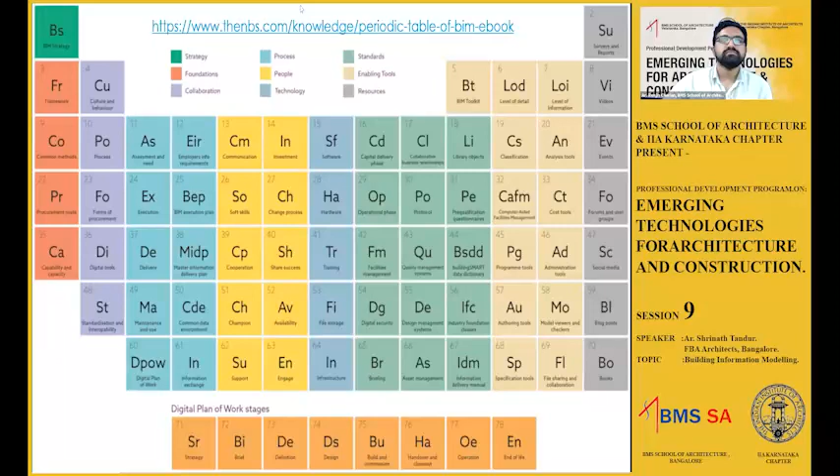Hi, Shrinath. Thank you so much for a fantastic presentation. Very comprehensive. You didn't leave anything untouched. It's really a great job, great work, very hard work that you have done. I have a very simple question.

Recently, I bought this Apple iMac with M1. Yes. And it's super fast, actually, it really is. We bought one more MacBook also with M1, and it is really very fast, and the prices are very affordable, unlike earlier MacBooks or iMacs. Correct. So can we use this? I feel that probably people will prefer this over Windows going ahead.

Yes, I agree with you. That's why I mentioned it in the beginning when I was talking about the software platforms or your operating platforms. It depends on the BIM environment that you're planning to go to. If it's, for example, Revit, I don't think Revit has a Mac version. No, they don't have it. Yes. So if you're using ArchiCAD, sure, why not? There is a version of ArchiCAD for Macintosh.

So if it's in the ArchiCAD world, Microsoft Office will run on Macs, right? There is Microsoft Office or any other Office package that works with it. ArchiCAD and the other collaboration tools will work in a Mac environment. But it's not just one or two machines, Anant. It is your entire environment, a computing environment that I'm talking about. If it's just one or two machines and you're learning something, that's fine.